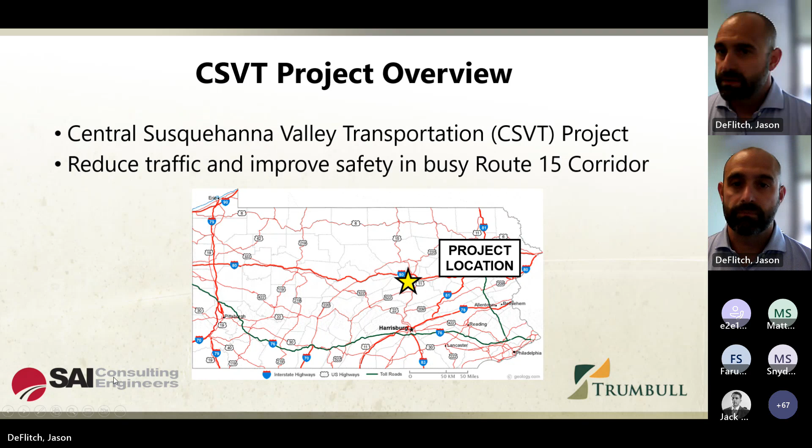There you can see the different sections that are involved in the project. So the northern section that's built, the central portion of the page along the west branch of the Susquehanna River, that's where our bridge is right here. Northern section being open, and then as Jack mentioned before with Matt, he's up there now building the southern section, which will connect everything down through Selinsgrove. This will get folks around that busy area of SR-15, get across the river, and then make connections to points north to I-80.

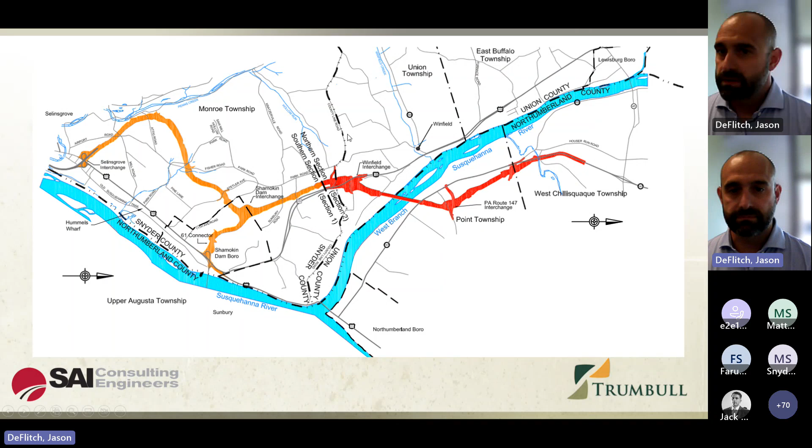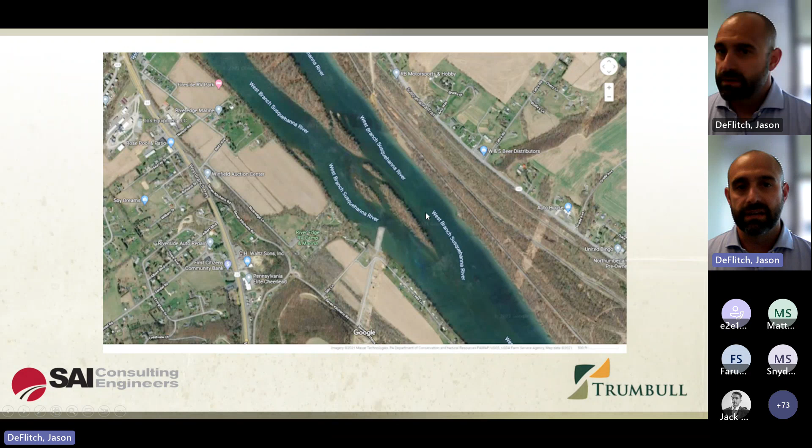Just a quick look at the topography of the area that we're talking about here. You can see the spur coming out in the middle of the screen there, right in the west branch of the river. That's where our structure is going to be. Kind of goes over some low-lying areas, a little bit of adjacent residential areas, over these islands that you see in the central portion of the screen. And then eventually does get into the railroads on the far side, and then connecting up through to points north.

So if you want, there is a website, csvt.com. You can check out. They still have updates up there for the ongoing project, southern section right now. The purpose, as I mentioned before, was to kind of get the trucks and the through traffic away from the local traffic to improve safety and then traffic flow as well.

So to do that, we're going to build a new 4-lane structure there, limited access highway through this area. It ends up being roughly 13 miles long, and it's separated into 2 sections that we saw on the couple slides before this. So we'll go through some of the challenges here with the bid phase, design phase, and then get into construction. I'll talk about the superstructure. I'll talk about the substructure and Matt the construction end.

Real quick on the bid phase before we move in, this was an alternate design. It was listed, plans were posted before advertisement as a planned project, and reviewed by a contractor with SAI and Trumbull together. Planned for this advertisement to come up with essentially an alternate superstructure and some substructure adjustments. That was then advertised and let in September of 2015.

TS&L was finished by the end of 2015 in December, and then the substructure design was submitted in March of 2016, and superstructure thereafter in April. So it was a very tight schedule, being an alternate design, to try to keep everything on track with the original design schedule that was planned.

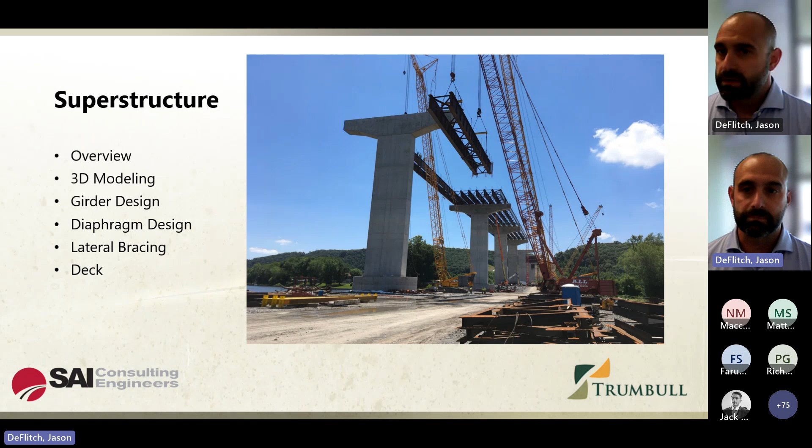So here's a general overview of the whole structure. As you can see, the total length of 4,545 feet, so nearly a mile-long structure. Was split into 15 spans, 3 units, 5 spans each, with each unit being 1,515 feet. This is all per the original design. None of the pier locations were changed to maintain all the permitting work and the H&H work that had been done on the project. So the focus here was to change a little bit on the superstructure and hold those pier locations, and then assess the piers.

So you can see the spans range from 238 feet to 350 feet. Most of the units, Unit 1 and Unit 2, have identical span arrangement, with Unit 3 having some adjustment spans to get up toward abutment 2. There is where we have the 238-foot span. It was in PennDOT District 3 and roughly a $156 million contract.

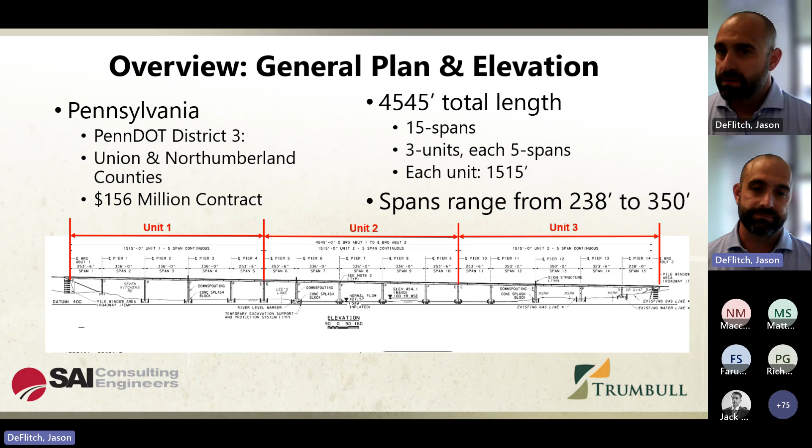So what you see on the screen is a typical section of the bridge, and this is the future section. So you're seeing 3 lanes here versus the 4 lanes that I mentioned before. That is accommodated by the just over 5-foot overhang that you see on the screen. In the current condition, it would be built to just over 2 feet and then widened 3 feet to either side. That would accommodate this future typical section and allow for traffic to flow during a redecking operation.

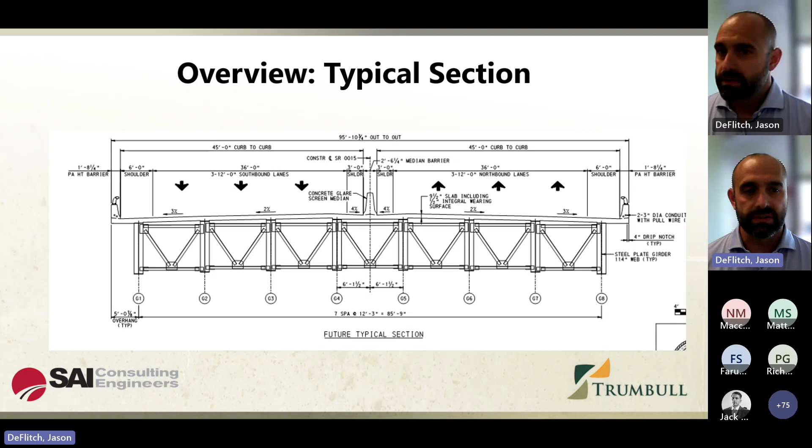So you see the 8 girder section that we have here, the diaphragms connecting them together, and the configuration and the future condition with the 3 lanes and the 6-foot outside shoulders. So take a look at the redecking that would need to occur. This had to be accounted for in all design elements. So in the girder design, diaphragms as well, all the way down through the substructure. Maintaining those 4 lanes of traffic in each particular phase.

So you see the first phase at the top there showing 4 lanes of traffic being maintained on the left side while we rebuild and widen to the right. Again, switch traffic over to that side that we just built, then do the left. And then of course, with longer span structures like this in particular, and the traffic that needed to be maintained, there's a closure pour between girders 4 and 5 anticipated in this redecking condition. And each of these phases and the differential deflections, et cetera, would have to be accounted for in the design of the structure.

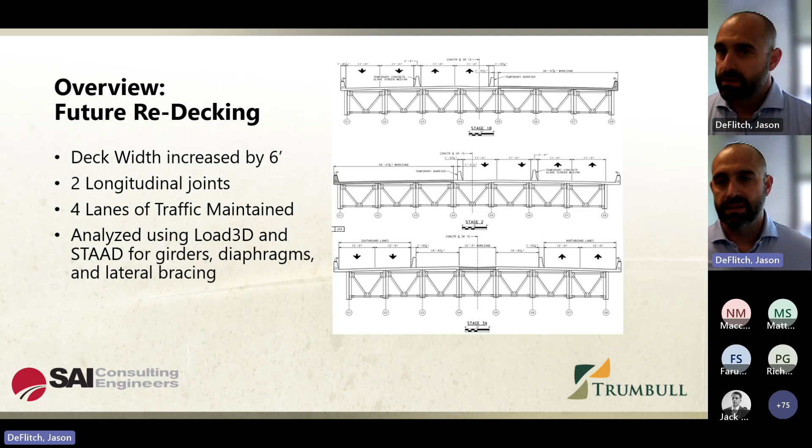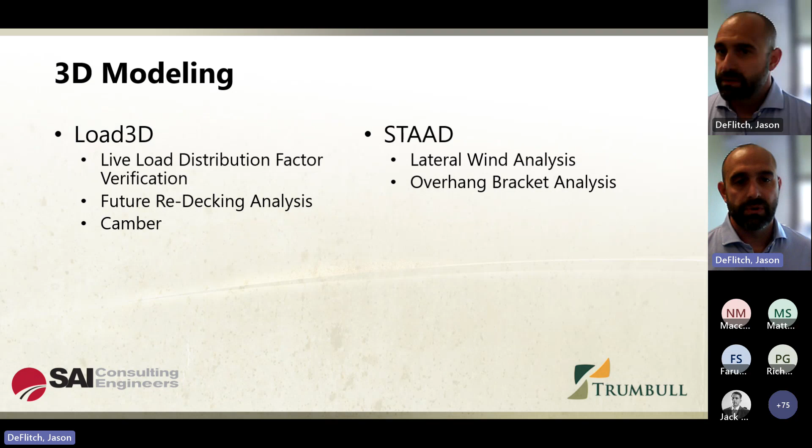3D modeling: we used two programs to do our 3D modeling. LOAD 3D was a SAI program that is approved by PennDOT. We used this for live load distribution factor verification, along with the redecking analysis for the girders and the camber. And STAAD was utilized a lot for the lateral wind analysis, overhang bracket analysis, diaphragms, etc.

So getting into the LOAD 3D live load modeling that we completed on the project, we did look at 3D distribution factors, what would be an equivalent distribution factor for these girders based on a 3D analysis. We're able to compare those load effects with line girder distribution factors and determine between the two, whether it was a line girder or the 3D, which one had governed, and use the worst case results for the design. For the most part, line girder distribution factors did govern, except for shears at the ends.

We're able to then get this into the STLRFD program and still use PennDOT's standard STLRFD program for the girder analysis. Future redecking was very similar. You could do a 3D analysis, check out what we thought distribution factors were governing in that condition, and then account for that condition in our girder design. We did model all the diaphragms and the lateral bracing in LOAD 3D, and we're able to extract some of those results for the design of those members as well.

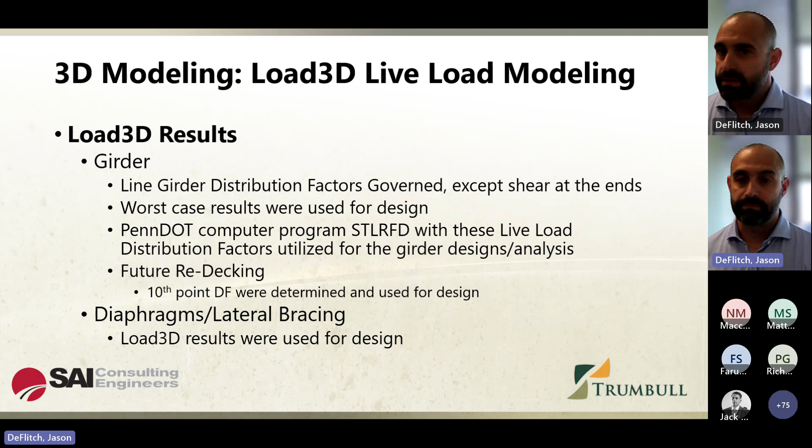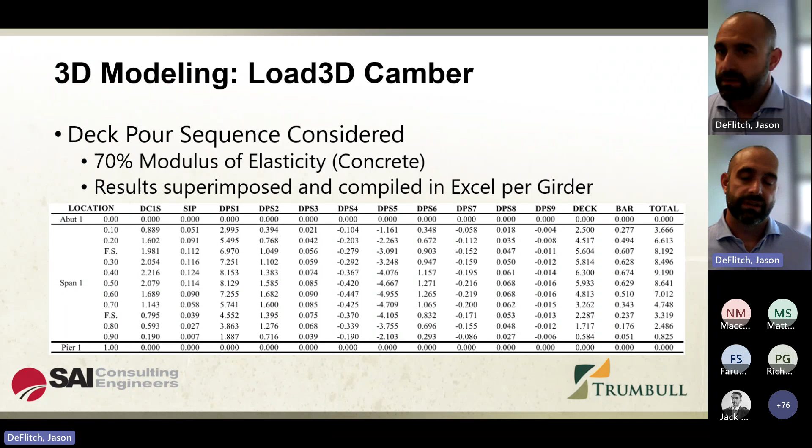Once the concrete was poured in a particular span or location, we used 70% of the modulus of elasticity per design manual for that concrete, and then compared each of the girder results in the end, and we're able to determine that the camber for each of the girders was roughly equivalent to each other and come up with one camber table that would be considered on the project.

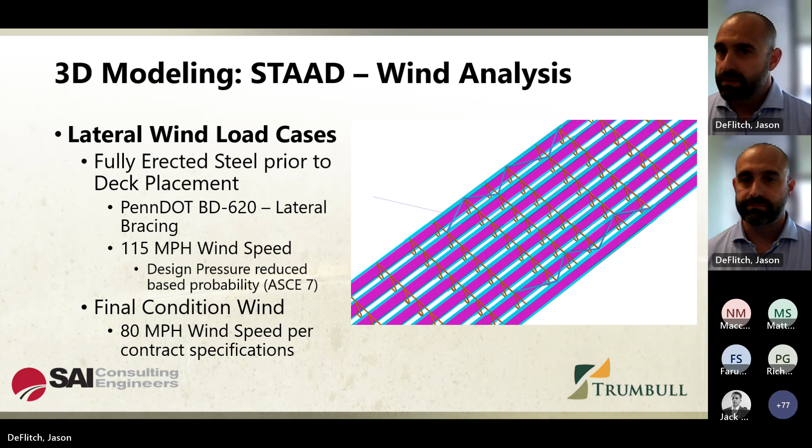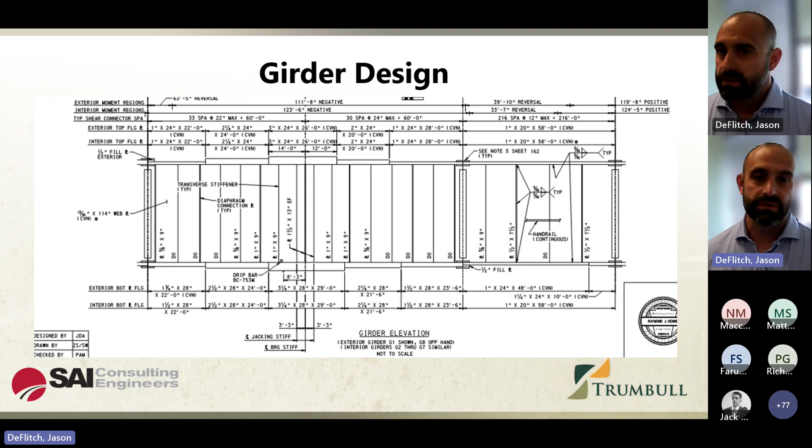So looking at the overall girder design, the web size is 114-inch by 13/16. That was set by a span to depth ratio. That's the depth. Once we have the depth, we wanted to ensure that we would not need a longitudinal stiffener. So we're able to take a look at our ratios there and determine what thickness of that particular web size would be required in order to prevent that longitudinal stiffener. That's how we came up with that web size and held that web size.

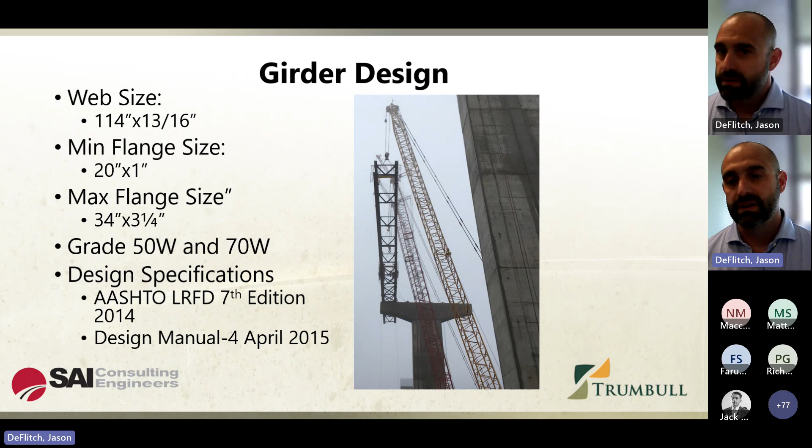So you can see the variation in the flanges as well, from 20 by 1 to 34 by 3 1/4. So a large variation there, but also as we're going through the design here, we want to create some repeatability of those flange sizes so that we can procure certain amounts of flange size material, cut that, and utilize that throughout the length of the girder in our transitions. It was a hybrid girder, so weathering steel 50W, 70W there, along with the design specifications you see below that we designed.

STLRFD, as I mentioned before, was utilized. So after we're able to make that comparison between the 3D distribution factors and the line girder distribution factors, come up with the controlling distribution factors and put them into the user-defined distribution factor command within STLRFD to account for them appropriately.

Lateral stress, we could extract that from each of the 3D models that we saw before, account for the fact that we have diaphragms in there along with the top flange lateral bracing, see how that affects the stress on the girders, utilize the LAS command rather than what would be a more conservative assessment when designing our girder in STLRFD. We did check each of those conditions. So you have the fully erected steel, then you have the deck placement during the actual deck placement operations, and then the final condition where the deck is hardened and we now have our composite section.

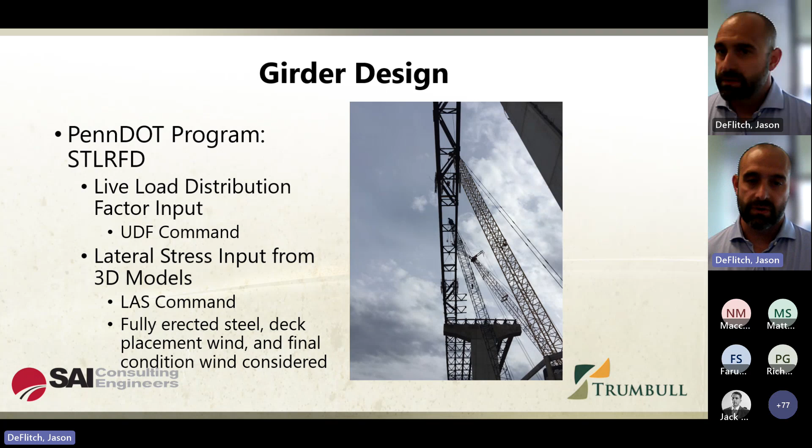So to get that economy of scale, that repeatability that I mentioned before, you have 8 girders over 15 spans. So yes, if you make small changes, those results can result in significant savings over the length of the structure itself. But you do want to create some repeatability in there for the fabricator in their procurement of steel and in the fabrication process. In addition here, the code's going to say that the exterior girder has to be at least as strong as the interior girder, but it does allow for you to have the exterior girder be stronger than the interior girder. In this case, the exterior girder design governed, and we did make the exterior girder stronger than the interior.

The web, as we mentioned before, was set based on the span to depth ratio. Try to ensure that we weren't going to need longitudinal stiffeners, and the transverse stiffeners that you saw in the girder sheet that we showed before, that was just around the piers. Try to limit the amount of that expensive steel detailing to just where it's needed around the piers.

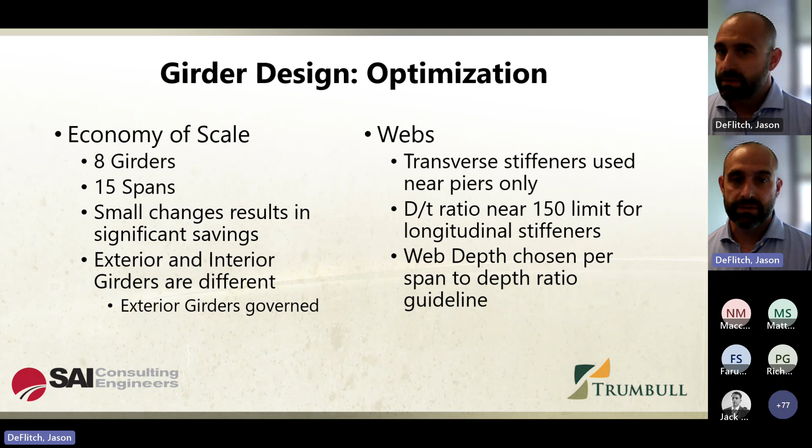So for the flanges, we did have a combination of grade 50 and grade 70 to utilize. Tried to have our typical rule of thumb to save 1,000 pounds of steel in order to make a transition. That tighter diaphragm spacing, of course, you want to limit the amount of diaphragms you're going to have, the expensive detailing for those diaphragms throughout the length of this structure. But you also want to gain effectiveness for those flanges. So the tighter diaphragm spacing was held just around the piers to try to help the flanges with lateral torsional buckling. And the 3D models that we had included the bracing loads to reduce the loads on the girder, try to maximize what we could get out of those flanges rather than a more conservative approach in allowing STLRFD to calculate the wind.

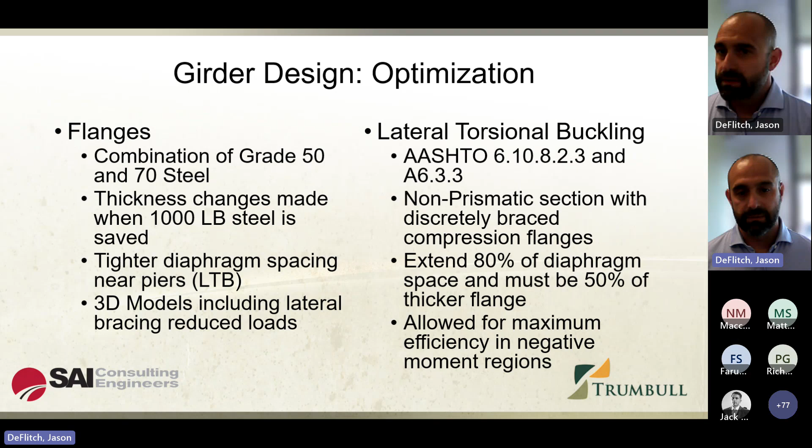So to take a look at that lateral torsional buckling, you see the sections of AASHTO that we have there for non-prismatic sections discretely braced around the pier. There's a couple of items in that section of AASHTO which, if you utilize those, can help with your design. So if you extend the thicker section at least 80% of a diaphragm space, and then you transition down your thinner flanges at least 50% of your thicker flange, you can gain the maximum capacity of that flange. And something that STLRFD really isn't going to point out to you is if you're at 79%, that you're inefficiently using the sections that you have. So it's good to be aware of little points of the code like that that can assist you in getting the maximum amount of value of the steel that you're providing in your design.

A long structure like this is going to have a lot of field splices to put the girder together. So we had 384 field splices total. Want to gain efficiency out of our splices as well. We're able to use a Class B slip surface. And then in order to help out the contractor, as you imagine, it's not just the thickness of the steel plates that's going to occur here or even the number of bolts, but each one of those bolts takes labor time to put the girder together. The contractor in this case was looking to use cranes to make these connections in the air. So every bolt that can be saved is going to gain efficiency in the end with the contractor.

It's one advantage to being on a team with the contractor that you can discuss that with them and then adjust your design to try to help out what will actually occur in the field. So we use the 1-inch bolts, minimize the number of bolts used in each of these field splices, and then try to group the splices together as much as we can. Again, trying to gain efficiency in the splice design, but gain some repeatability for fabrication and for the contractor as well.

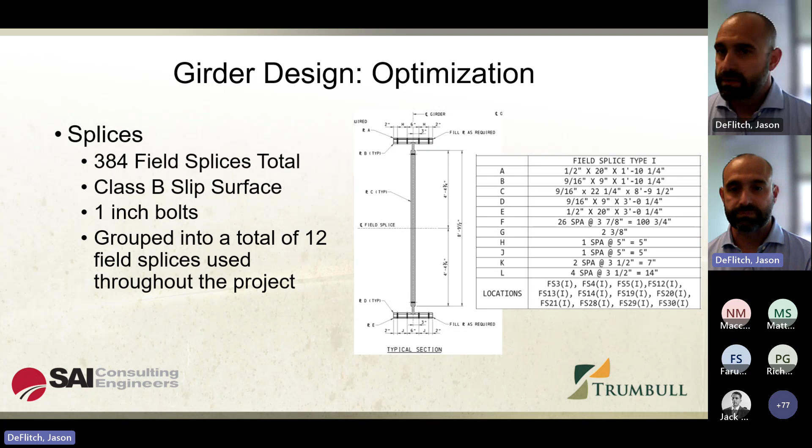So detailing wise, all the stiffeners and splices occur at the same location for all girders. So again, creating that repeatability for the contractor and the fabricator. You saw the flange width in the previous slide that we went from 20-inch flange width to 34-inch flange width. So those transitions did occur at the field splices, which gained some efficiency in those transitions.

The camber table was the same for all girders. We were able to make that comparison based on the 3D camber table that we were able to extract. And then that communication with the fabricator and the contractor really helped throughout the design to implement things such as the 1-inch bolts that we were able to utilize in the splices.

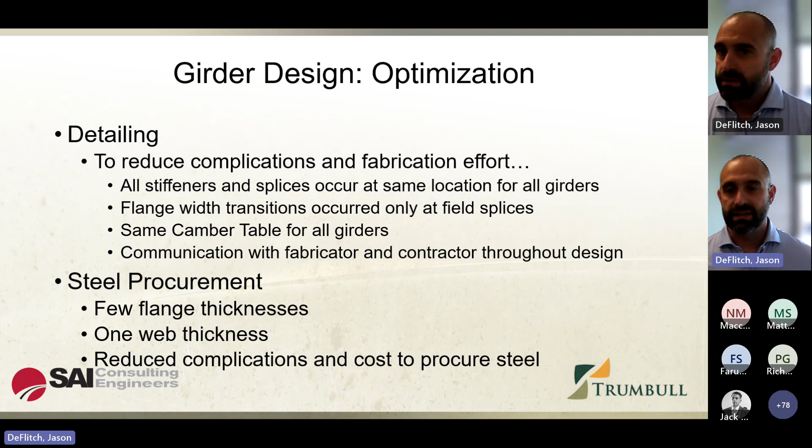So looking at the diaphragm design, again, number of diaphragms utilized throughout the length of the girder, not all that dissimilar from the splices. Want to create some groups of these diaphragms for repeatability through the structure, but at the same time want to gain some efficiency in our design. We ended up with 9 diaphragm types throughout the structure, but even with those 9 diaphragm types, we were able to limit the angle sizes used on the project to 5 different angle sizes and allow those to be reused in different configurations and in different diaphragms based on that design.

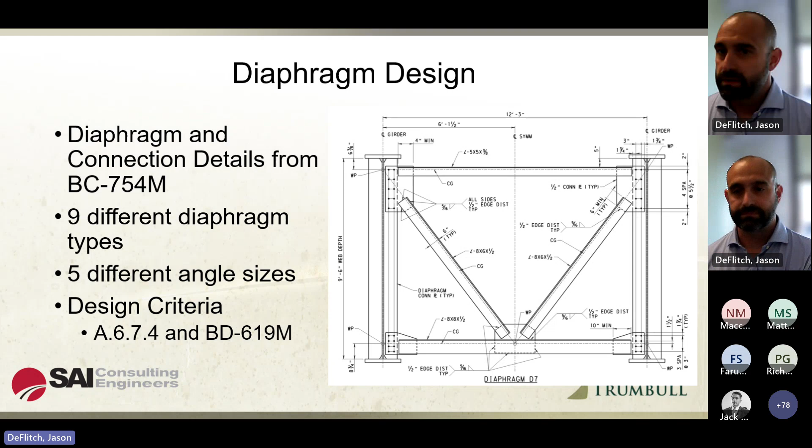So utilizing the 0.65 area reduction for single angle connection eccentricities, the DM4, that'll help limit the amount of load that's drawn into the diaphragm for the diaphragm design, and then account for the diaphragm design with each of the conditions that it would be under. So you have the final condition and the redecking condition that's going to be governed by Strength I, Strength II. But then you have your lateral forces, particularly the wind on a tall structure like this. We're going to check Strength III.

That's going to be the erected steel, deck pour condition, redecking, and final conditions as well, just to verify for those lateral forces. And then fatigue as well. You have the end welds of these single angle connections based on the BC-754. And that did control some of our locations here for how we detailed the size of these angles.

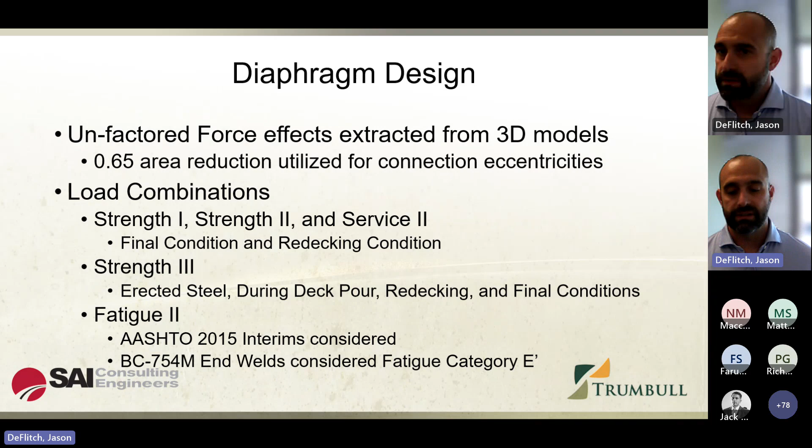In addition to the applied load effects that we got from the 3D analysis and accounted for in the diaphragm design, the diaphragm also, as we mentioned before, for lateral torsional buckling, is going to provide bracing to the girders. So you can use the criteria that you see on the screen, calculate the force that you'd expect in the diaphragms to provide that bracing support to each of those girders. It becomes an additive effect on the applied loads to the structure that then be combined in each of the combinations that we saw before.

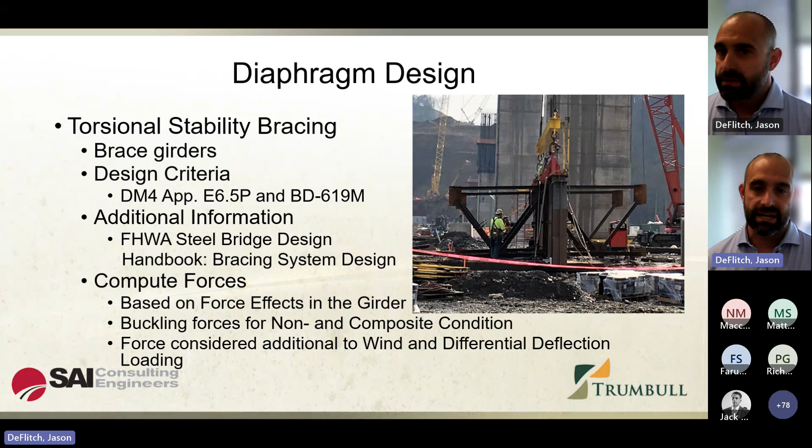It's gonna help when you have the deck cured in the final composite condition. You'd be concerned with the bottom flange bracing that would occur in that state. And before that, when you don't have the deck in place and you're checking those conditions that you have a non-composite girder, you're going to account for the bracing force of both the top flange and the bottom flange, just minimizing when you're considering this bracing force to maximize the efficiency of your design.

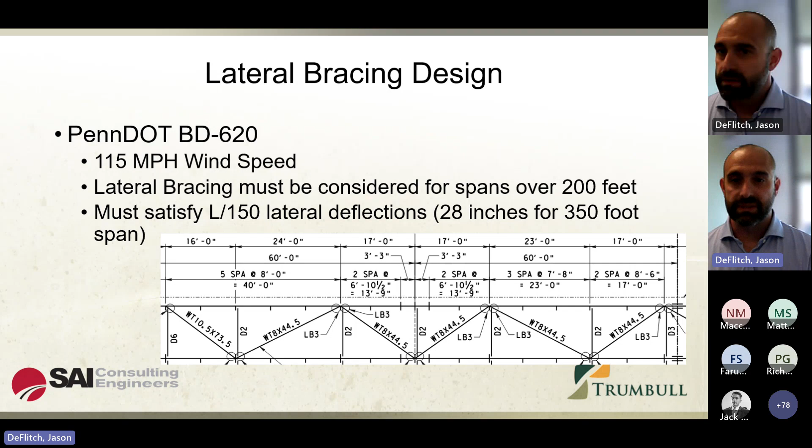Lateral bracing was provided per PennDOT BD-620. That's accounted for that 115 mile-an-hour wind speed that we mentioned before, and the L over 150 limitation for deflection. So you can see for the 350-foot span that we had on the structure, the 28 inches that it was limited to before. So we centered this around the pier and incrementally worked out until we were able to limit the deflections and supply lateral bracing where it was needed.

The top flange lateral bracing was utilized with a bolted connection to the top flange. We tried to limit the amount of sections that were utilized, so I used a WT8 and a WT10.5 as the 2 different sizes for WTs that were utilized as the lateral bracing, try to increase that repeatability and some efficiency of the use of these shapes throughout the project. We included dead, live, and wind loading in these designs as well.

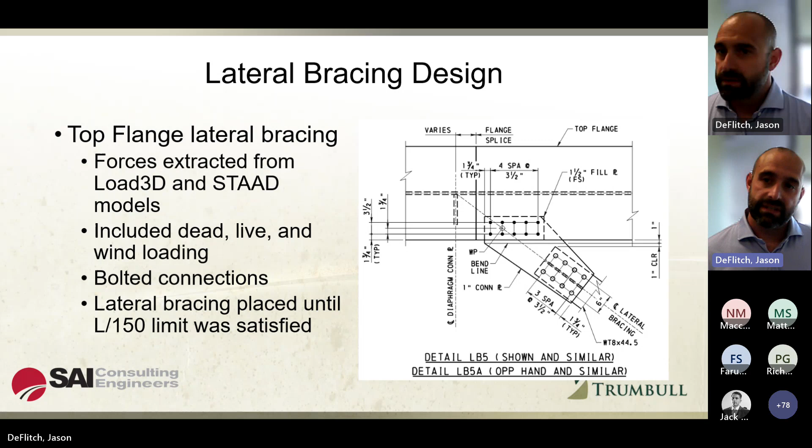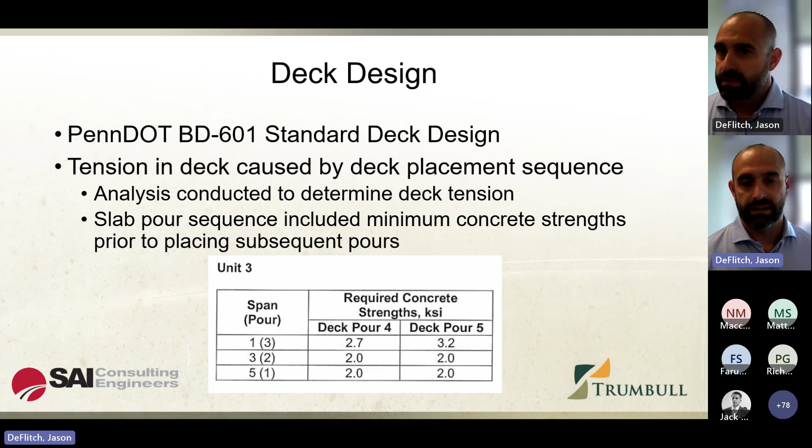With that, I'll turn it over to Ahmad here, and he can discuss the substructures.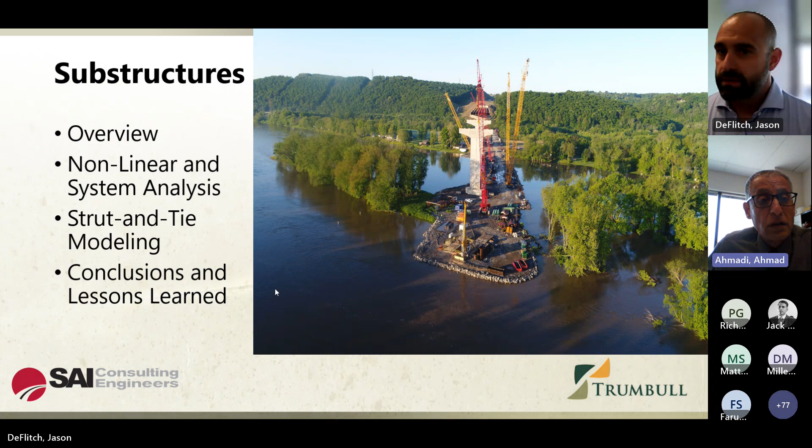Overall, there are two stub abutments on piles, steel piles, and there are 14 piers. Of those 14 piers, 6 of them are in the water. 5 of those 6 in the water are on caissons, 8 caissons, 5-foot diameter caissons, and the rest of them are on spread footings.

There are 4 expansion dams on this bridge. 2 of them are finger dams, and 2 of them are modular dams. The modular dams are located at Pier 5 and Pier 10. Those 2 dams' displacement is approximately 22 inches.

On an overview of the pier cap. The pier cap is approximately 90 plus feet long and 18 feet deep. At the stem it is about 18 feet. At the tip of the cantilever it is about 9 feet deep. And the thickness of the cap is 9.5 feet.

The stems of these piers vary from 56 feet to 159. This is from the bottom of the cap to the top of the footing. And the width of it is 28, and the thickness of the stem is 9 feet. Some of these piers, the 6 in the water, have a mass concrete underneath them, a plinth.

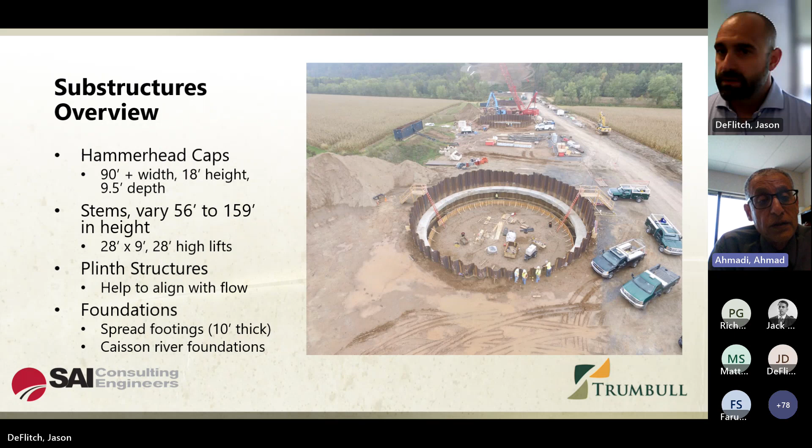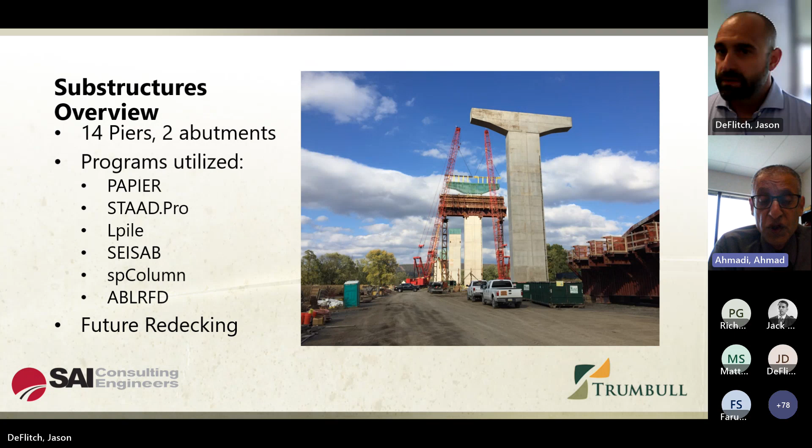For the analysis of these substructures, the programs we used are PA-PIER, STAAD.Pro, LPILE, SeisAB, spColumn, and ABLRFD. And these substructures are designed and analyzed for the future redecking or the final structure.

We used SeisAB because, as per AASHTO and Design Manual 4, you have to design a substructure for approximately 30% of the total dead load for the seismic analysis. We used SeisAB, and that resulted in approximately 10% of the total load. There was a big load reduction for the seismic in that case, and seismic did not control.

For the structure analysis, when we do the pier analysis, when you have multi-fixed piers, which in this case we had, there are 3 units. Each unit had 4 fixed piers, except unit 3, which had 3 fixed piers. When you have multi-piers, you have to do a more accurate analysis, whereas when you have 1 fixed pier, you can just take the tributary wind load and apply it, and that's all it is. When you have multi-fixed piers, the stiffness of the system makes a difference. Therefore, you have to do a system analysis.

The system analysis is when you model all your piers and your superstructure as a stick model, not complex, a stick model all together, and the displacement and stiffness of each one affect. For example, in these structures, in unit 1, we have 4 piers. Out of these 4, pier number 1 attracted, in the final design, 50% of the total horizontal loads. While if you do a simple analysis, you give it tributary 25% of the horizontal loads. But the system analysis showed that 50% of the load went to just 1 pier, and the other 50% to

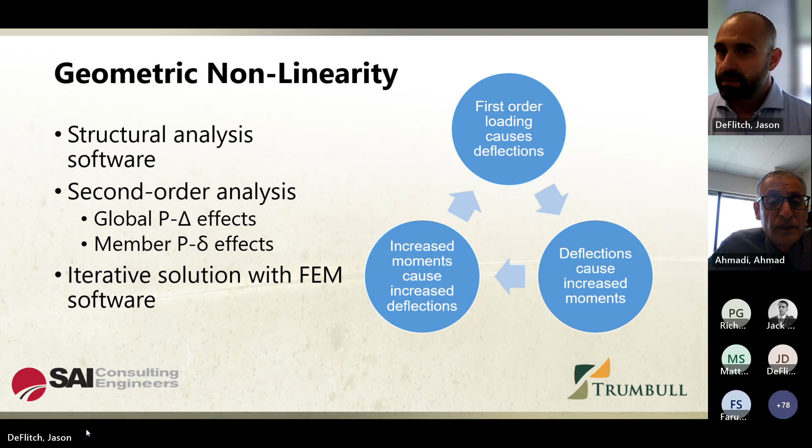Next one, please. Jason, next screen, please.

Overall, Strength 3 and Strength 5, which is wind, control the design. For service, a modified service load case was considered for this bridge, because for a bridge this tall and in this location there was a possibility of high wind occurring with the temperature at the same time. Therefore, a modified service load was created, which is wind at 115 miles per hour, corresponding to 80 miles per hour base wind versus 50 miles per hour in LRFD or the design manual. And that also controlled some aspects of design. As I mentioned, we did all these load cases and load combinations for different stiffnesses based on the moment curvature section properties. Next screen, please.

For pier design, we used the PCA program. However, from our STAAD model we computed the moment, because that moment is a function of the P-delta, and we were not supposed to use the moment amplification factor in the program. And also because the moment was different based on the stiffness, we took the moment from the STAAD model and manipulated some parameters in the input to make sure the design of the pier would be based on the shear and the moment of the STAAD model.

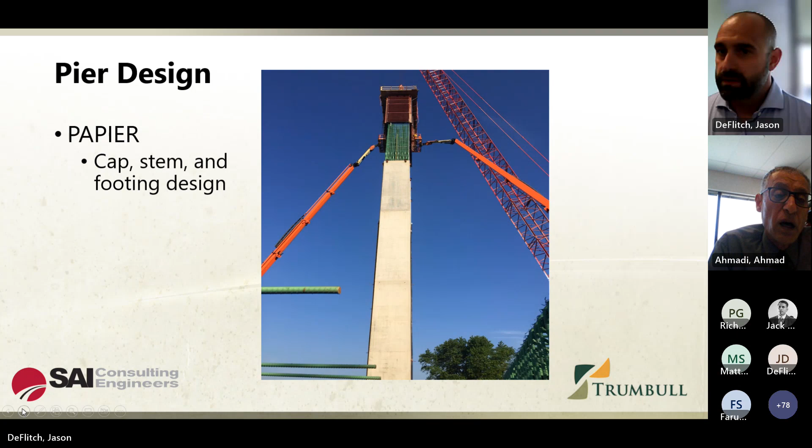These are some reinforcement for the stem. As I said, we divided the stem in 28-foot segments, except one odd segment at the bottom. This made it very easy for us for the drafting, a lot of saving in the drafting, and also a lot of saving for the contractor, that he knew that all his sections, except that one section at the base, are going to be 28-foot long, and then his forms and everything reused over the entire 159 feet based on that 28-foot.

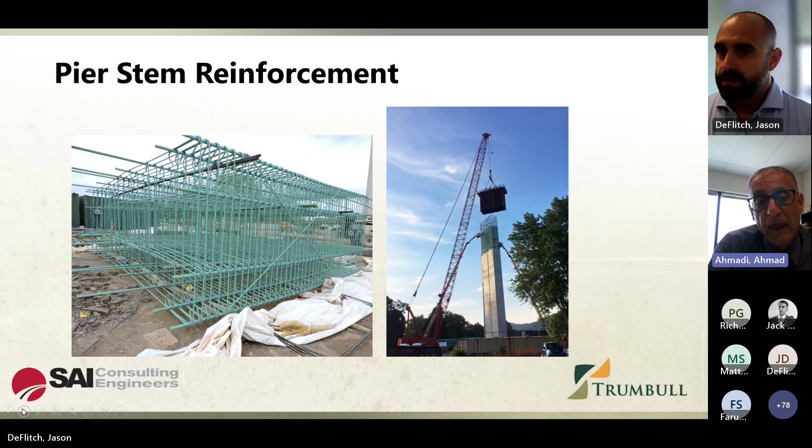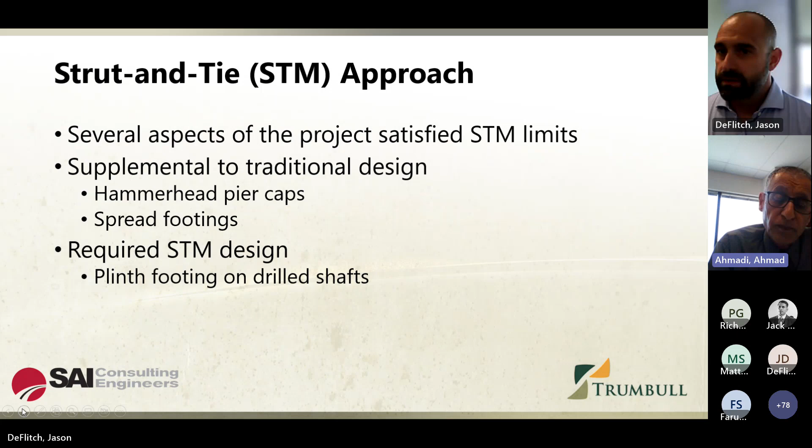Jason, next screen, please. The other thing was a strut and tie method we used here. Per AASHTO, our cap, our footing, and the plinth at the bottom were supposed to be done with a strut and tie method analysis besides the conventional. We did several strut and tie method analyses for the cap, the footing, and the plinth, and based on those results, we revised our reinforcement, and it was the worst of the two, traditional analysis and strut and tie method, especially with the cap shear reinforcement controlled by strut and tie method.

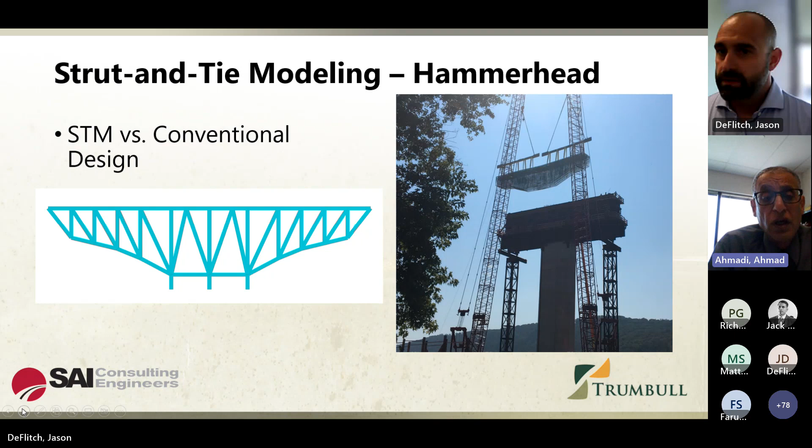Here you see a model of a strut and tie for the cap. This is for the full width of the bridge. And also we did another one, which is next screen, for the half-width construction. We also analyzed our pier cap for strut and tie method. This is the strut and tie method model for the half-width construction. As I said, the shear reinforcement is controlled by strut and tie in this model.

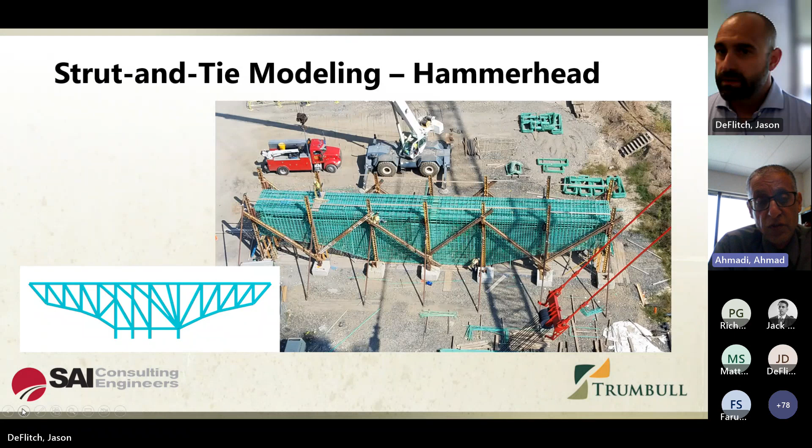Next screen, please. This is the plinth I was talking about. As you see, the plinth is in line with the stream, and then the stem is skewed to the plinth. This plinth is approximately 60-foot long and 30-foot wide, and something 15 to 25-foot high. And we did a strut and tie method for

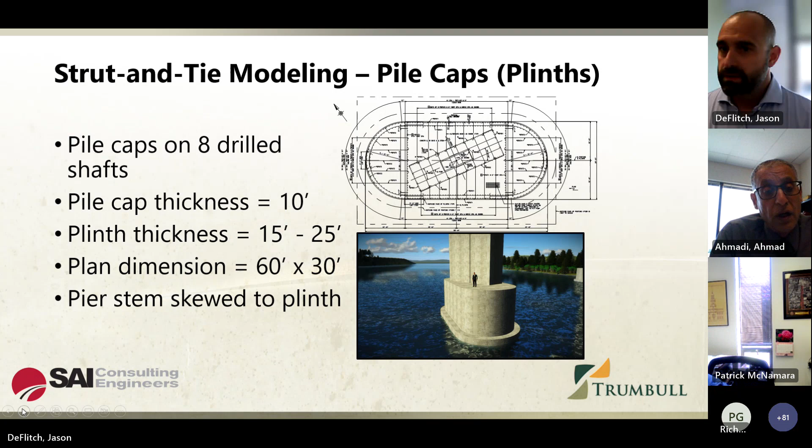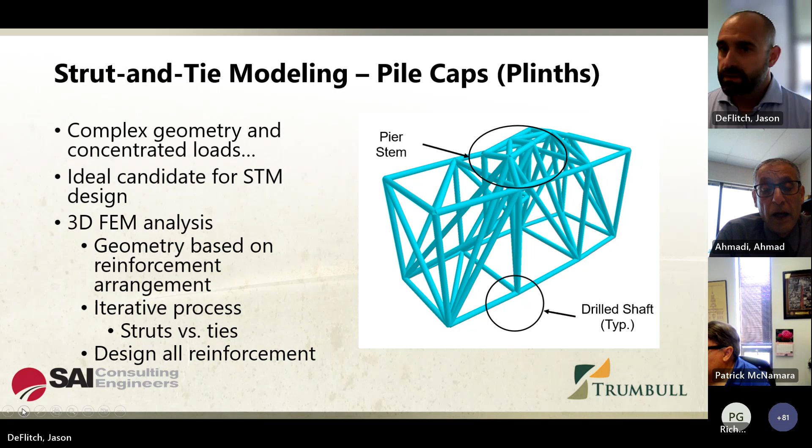the plinth also. Next screen, this is the strut and tie model for the plinth, which is a very sophisticated and complex trial and error method to find the correct model for your strut and tie method here. Some of the reinforcement, their length, controlled by development length, is controlled by the strut and tie method, which will be adjusted accordingly. Next screen, please. This is the actual reinforcement of the plinth. You can see how massive it is.

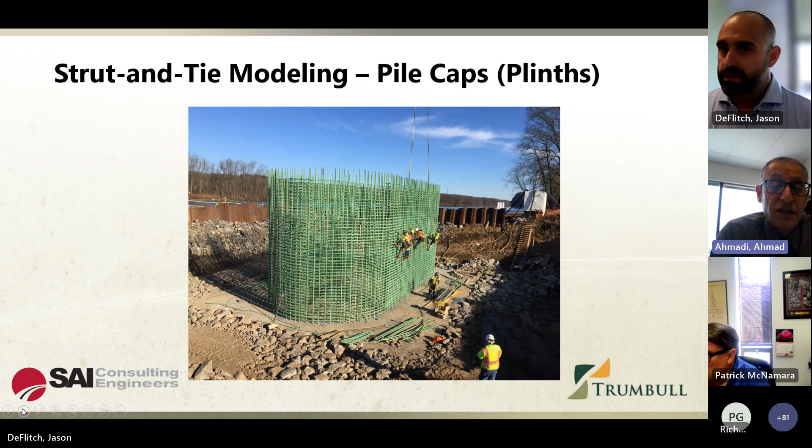Next one, please. Okay, again, this describes that the abutments were on steel piles, and the piers, the 9 piers, were on spread footings, and the 5 piers on 5-foot diameter caissons. And we used LPILE and spColumn for design of the caissons.

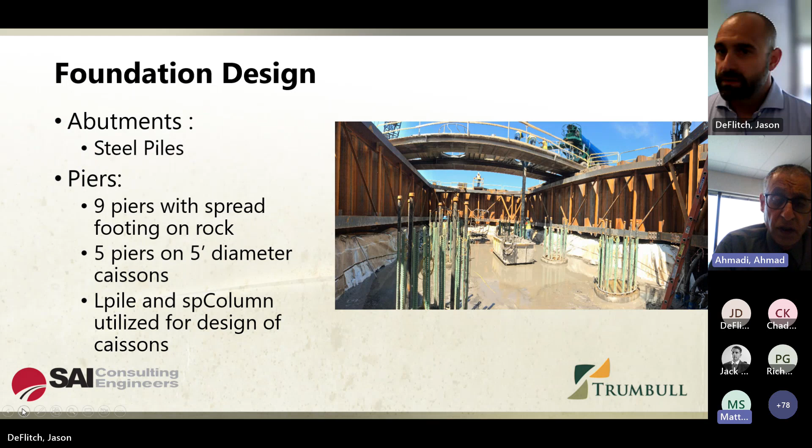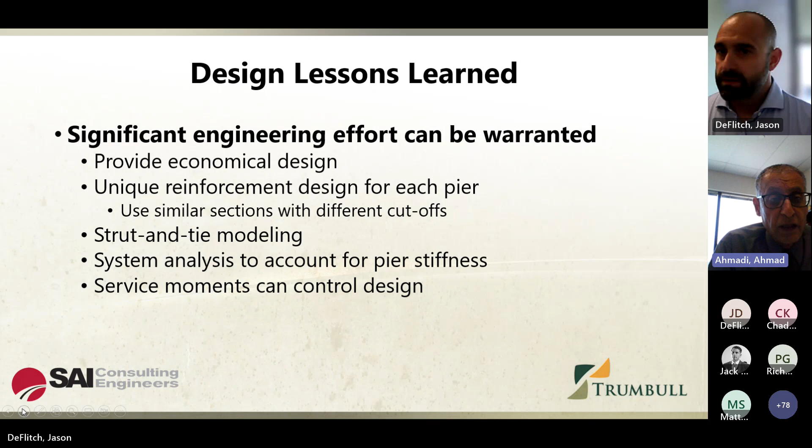Next one, please. The design lesson we learned here is that the time we spent on those substructure analyses paid off, because we made a significant saving in the rebars. The strut and tie method on all of those provided a much more accurate design. And also the moment curvature provided a very accurate design, and it resulted in correct distribution of the load between the substructures. And also, as I mentioned before, the modified service moment controlled part of our design. This is the overall overview of our substructure design. Now Matt is going to talk about the construction topics.

Hey, good afternoon, everybody. Can you hear me? Yes, we can. Yeah, we can hear you, Matt. Okay, just making sure, an audio check there.

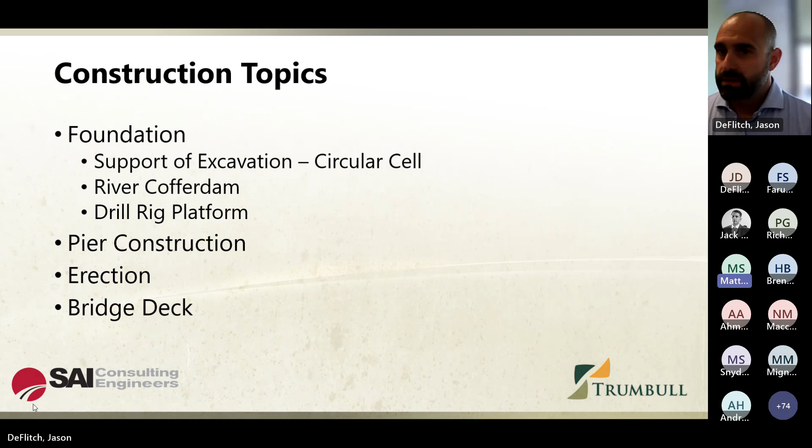So for the construction side of things, one of our first challenges was gaining access to the foundations for the bridge. If you can go to the next screen, I can show a picture here. We had several types of shoring that were required. This picture to the right was taken from abutment 1 looking out across the bridge. Of the 14 piers, only Pier 1 could be open cut, which is in the foreground of this photo. All of the land piers adjacent to the railroad tracks, on the other side of the river from this photo, were all more or less a custom cofferdam to address each track individually.

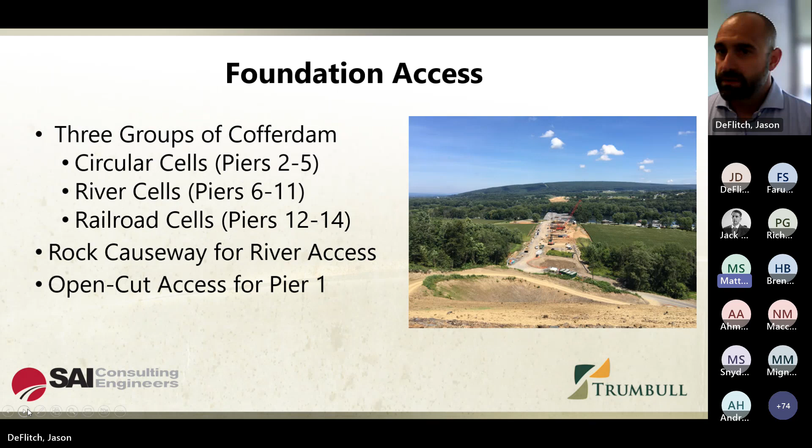Then all the remaining cofferdams required for the land piers were a circular cell with a concrete wale. We somewhat standardized that process to help with fabrication, material procurement, and construction in the field. And then there were piers in the river. For all of those we standardized the cofferdam frame and used sheet pile in and around our causeway for access to those foundations. Next slide, please.

Here is a snapshot of our circular cell design. As you can see in the photo there, the foundation, the footing of it is in the wide open. As large as these footings were and as deep as they were, ranging from 25 to 30 foot in depth approximately, with a rectangular shaped cofferdam, most designs we looked into would have required some type of center strut, which would have conflicted with both the foundation formwork and the stem formwork.

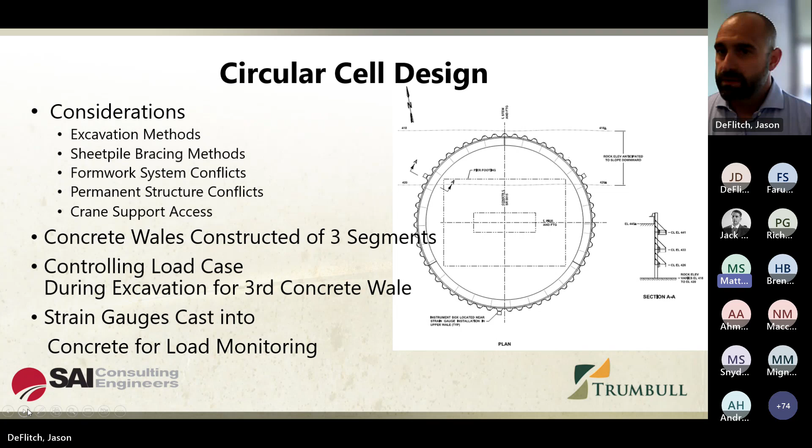So a new approach was looked into where we actually did a circular cell. So yes, we fit a square peg in a round hole there. We just made the diameter of the cofferdam large enough to encompass everything. And we used a concrete wale to support the sheet piles as we excavated our way down. On the next slide here, you'll see a few pictures related to it.

So in the photo on the left there, we would drive our sheet pile in the circle. We had to design and construct a template. It was a chord section of that diameter that we could then set. It was 11 or 13 pair of sheets off of this template. We put onto it some survey markers so that way we could model it in a file and our survey could go out and shoot that template in so we could place it where it belonged.

Place our sheets around, drive them deep enough to be secure. Then once we made closure of that circle, we drove them all to depth. The photo on the right here shows the concrete wale construction in progress. You see the first wale there is suspended in the air.

There were rebar hangers that were welded to the sheet pile because it would prevent any kind of slippage or movement of that concrete wale during the time as you began excavating the cofferdam, before the sheet piles deflected with their load and engaged into that wale. There was concern that that movement could occur. So these hangers were used to eliminate that. Next slide, please.

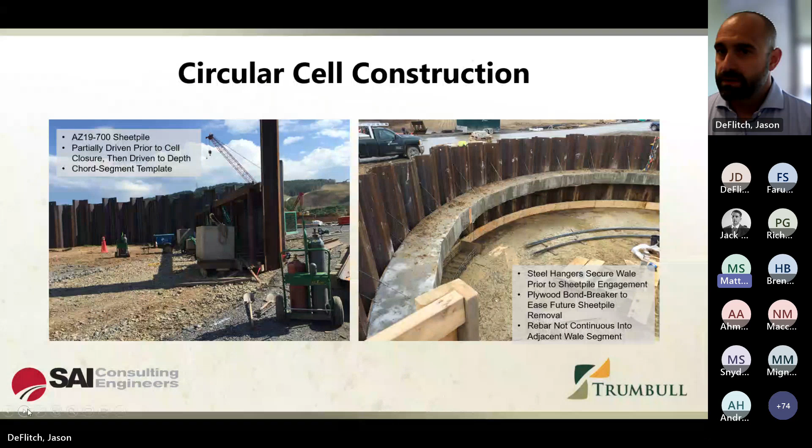See here in the photo on the left, the controlling condition for these cofferdams was actually not the final condition where we began construction of the concrete footing. It was after the second concrete ring was constructed and while excavating for the third. Because in that condition, your cantilever of the bottom of your sheet spanning down below that second ring was at its greatest. Once the third ring was in place, the remaining excavation was removed to achieve grade for the bottom of the footing.

You can see here in the photo on the right that this approach to a cofferdam allowed us free rein access. We didn't have any center struts to phase in and out or to work around, and we were free to fly our formwork in and build our pier stems without any distractions. Next slide, please.

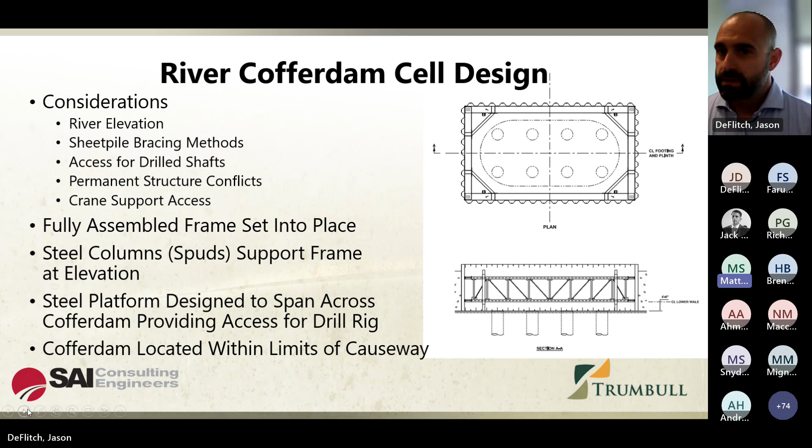So for our river cofferdam, we employed a similar concept where we designed the cofferdam template to be large enough and we utilized a corner style bracing. That way we could eliminate any type of center struts here as well. And we would design this frame and it was used for all of the piers in the river. It had to be large enough to encompass the construction of our footings, but it's actually small enough so we could get a drill rig to reach from the top surface to drill all 8 of those caissons. And on the next slide here, we'll see some more information there.

So in the photo on the left is that frame. We had it fabricated and assembled on site, and we would pick it up and set it in place as one pick. And we had 2 of these that we would leapfrog as we built our piers across the river.

The photo on the right: in order to drill down in and around those caissons, there was not enough room around the caissons themselves to fit a drill rig. So trying to figure out how to perform that work, we decided to get to it from the top side, which is why we had to keep the sides of our cofferdam small enough to reduce the span that this platform would need to reach across.

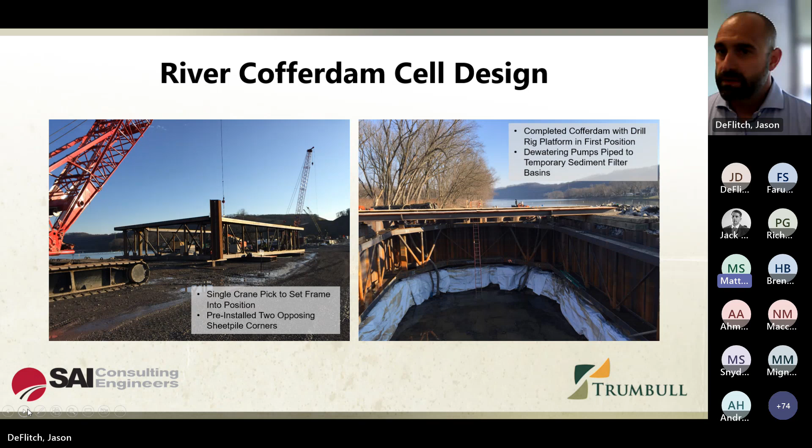On the next slide here should be some design details. So the platform was never designed to actually support the drill rig to tram across it, but more so to creep over top of the sheet pile, as you can see there on the right, to gain access to the drill shaft. So we would put these in 4 positions, so you could drill 2 drilled shafts at a time.

You would drill 1, the rig would then back up, tram around, and enter onto the platform from the other side, and then construct that shaft. And then we would move that platform along to each position to get all those shafts built in place. Next slide, please.

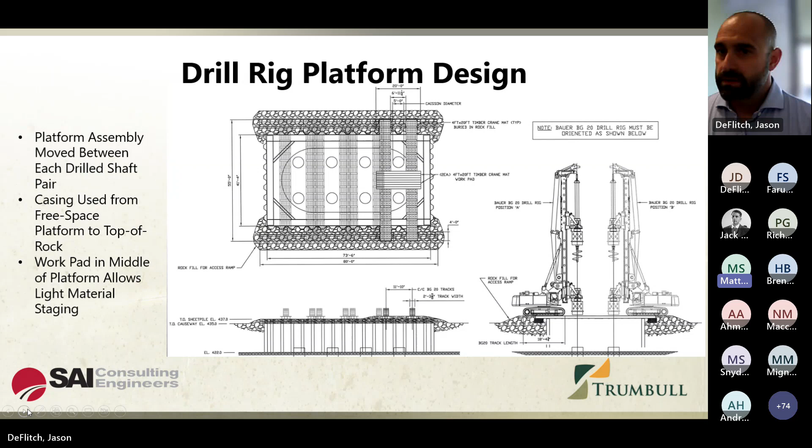We would case into the rock a few feet, so that way when we would drill and clean out the shaft, we would not have any surface water or anything leaking in from the top. The cleanliness spec for these drilled shafts for PennDOT in this district was very strict and severe, and so that was a concern, and this helped a lot with that issue. Next slide.

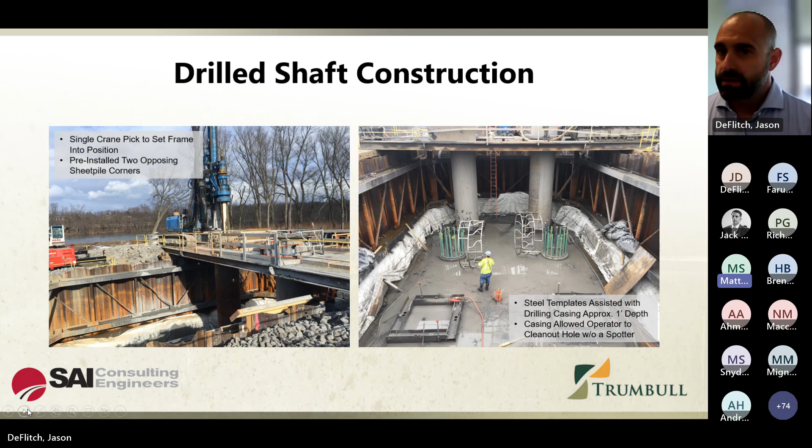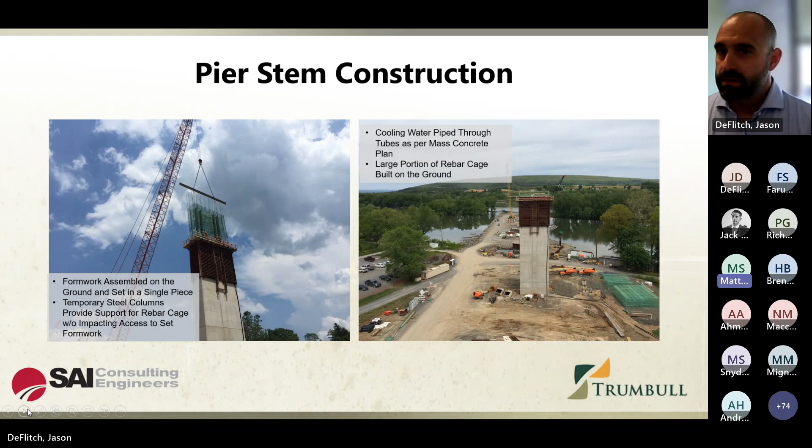That allowed us to pre-tie a lot of the rebar cages, as you can see there in the bottom right photo. We would tie those out ahead of time and stage them where the piers were at, and we would leapfrog our formwork accordingly based on the cure and the strength of the concrete prior to stripping forms. Next slide.

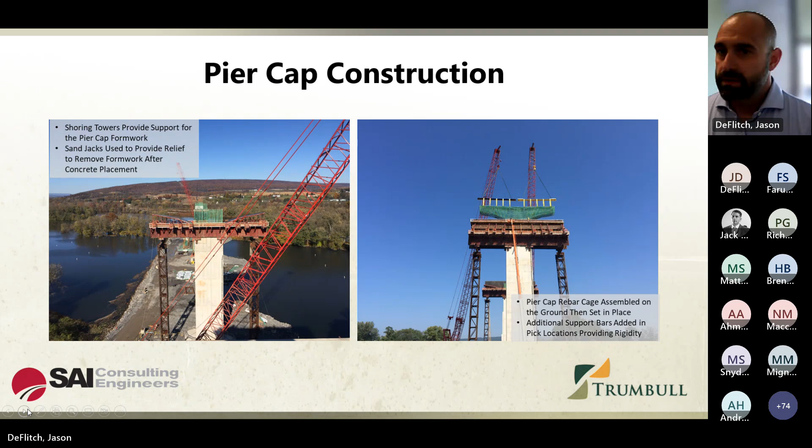For the steel erection, we subbed that out to Century Steel. They did not use shoring towers to erect the girders, with exception to around the railroad tracks, as that was a requirement for Norfolk Southern. So they would use multiple cranes in tandem. And the next slide here will have a picture of that.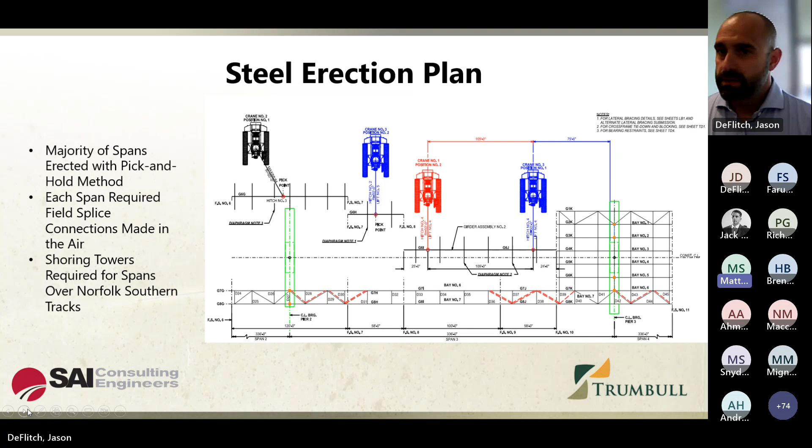If you want to go to the next slide, Jason, here on the photo on the left, they'd use the first two cranes to start setting the process, and then the third crane would come in and help, and they would leapfrog across the way, making field splices in the air. So the pros and cons here is it is a faster way to go. Con is once you start, you're committed to finish that span for that pair of girders.

So we had to pay very careful attention to the wind. So, in the middle of the day, if we thought wind was going to pick up based on the weather predictions, we had several that we consulted throughout the day. We would have a go, no go decision to make sure that we were not partially way through erection and then get affected by wind and have any problems there. And that planning worked out well. We had no issues related to that during the erection of any girders.

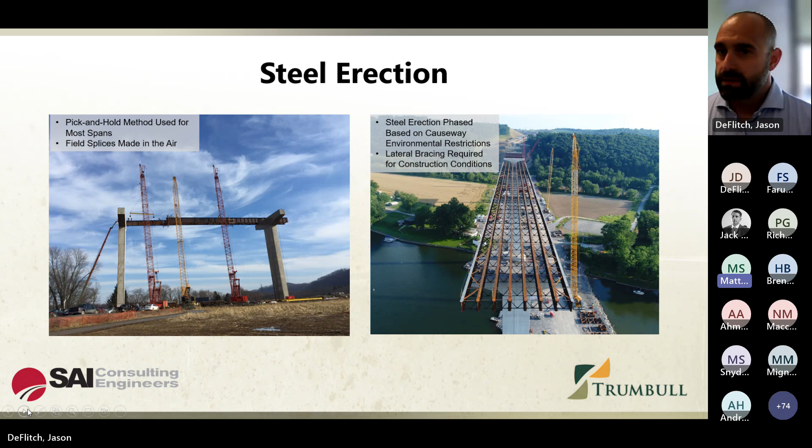The photo on the right shows where the first phase was complete. The river, we can only build the causeway halfway across at a time. So we could build one unit fully on land and a portion of unit 2, which was the unit that spanned the river. And this photo on the right here shows all 8 of those girder lines. I thought that was neat to show. Next slide, please.

Here's just more photos of the steel erection. In addition to going across the river, we also had live traffic we had to set girders over. We were allowed a nighttime detour, just one night at a time, to set the girders. So we had traffic set up during the day where we had barrier to take some shoulder width where we could deliver and dress the girders to prep them for erection the following night. And the photo on the right shows some of the shoring towers that were required for erection in and around the Norfolk Southern Railroad tracks. Next slide, Jason.

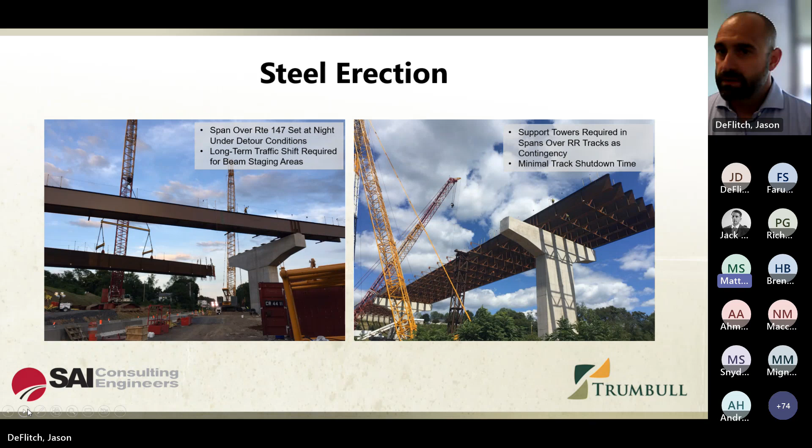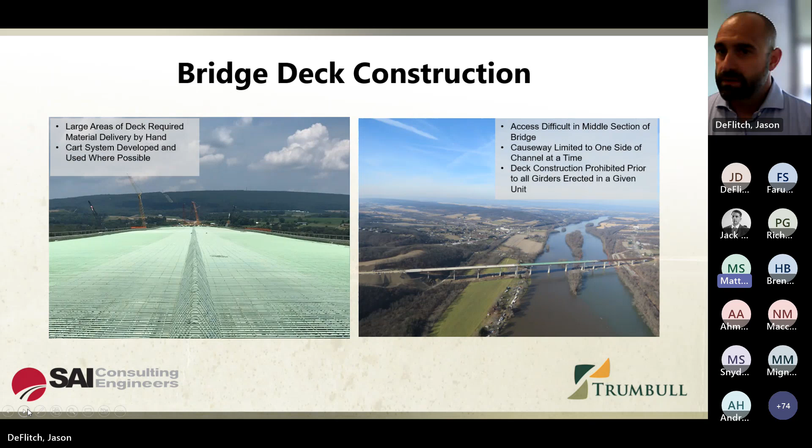We could not, like I said, build the causeway across the entire river. There were flooding concerns there, ENS restrictions. So we would build the substructure and set the steel girders, and then all remaining construction of the deck and parapets would take place without a causeway under you for that portion of the bridge. And some major challenges were, how do we physically get material out onto that deck? And for the most part, laborers had to carry it. You can see here on this photo another picture of the staging where we do have a causeway. We could use a crane to set the rebar up on the deck.

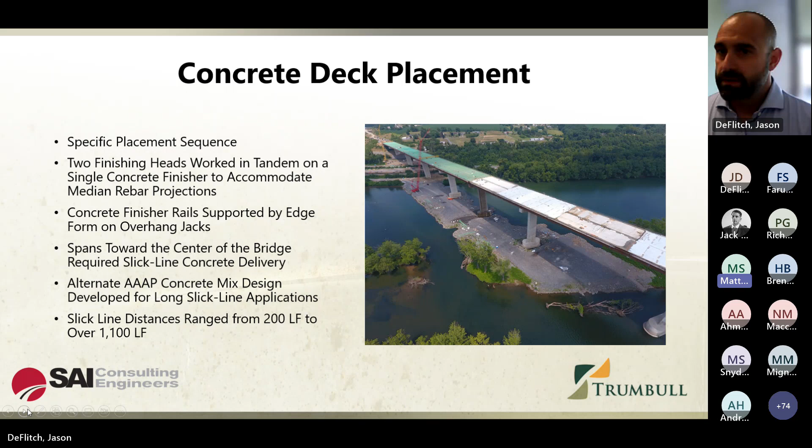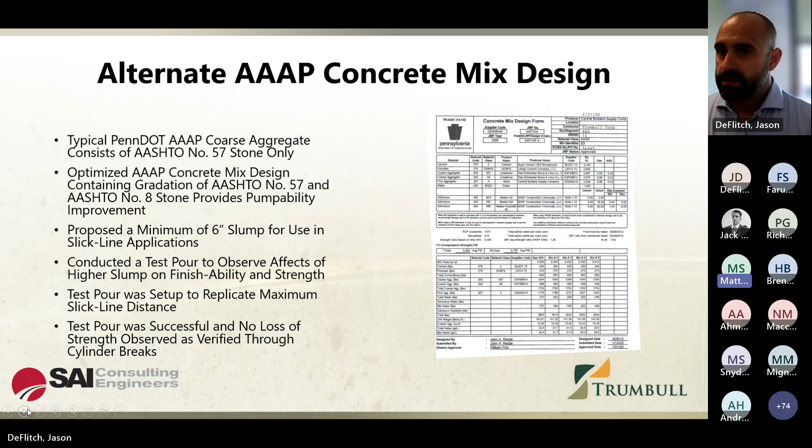Now, another challenge we had here was a slick line. In order to place the concrete out into the river sections, we had to develop an alternate triple AP mix and concurrent with PennDOT to meet their specifications. So we could come up with a mix that would perform through as much as our longest slick line placement, which was through 1,100 feet of slick line, which is a challenge. Next slide. Here is just that mix design, if anybody wants to look at that later. You go to the next slide there, Jason.

One of the last things here before questions is with our overhang jack design, it was pretty straightforward, but one challenge we encountered is up at that elevation, with no trees, no anything around, and it was a high wind location.

We encountered problems with overhang jacks being flipped up by the wind. So we developed a tie down system that had a slack line in it that would only let the overhang jack move maybe a quarter of an inch, and that slackness was required and important, so it didn't add any more downforce to the overhang jack and potentially overload it. Because we did use our overhang jacks to carry the weight of our Bidwell system in lieu of placing anything over top of it.

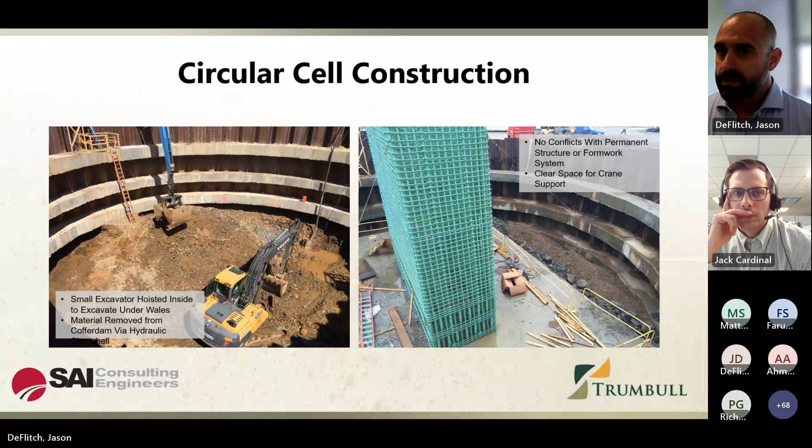Okay. All right, second question from Greg. What caused the discrepancy in stiffnesses in Unit 1 where 50% of the load went to Pier 1 and the remaining 50% distribution to the other 3 piers, 2, 3, and 4? Well, as I mentioned, that was because of the stiffness of it. That pier was a shorter pier, and then stiffness of it, because a lot of moment and also displacement at that end.

And what we found out in our model is that the forces, the wind, applied to the substructure of, let's say, Pier 3 or 2, went up through the bearing into the superstructure and went back to Pier 1. This is something we normally don't consider, how wind to the substructure goes through the bearing back to the other substructure, which the model showed happened.

Okay. And then lastly, how did the modified Service 1 load case with 115 miles per hour come about? As I said, that was to be a little bit conservative and realistic. We said that the possibility of wind of this amount with a high temperature day could happen on that structure. And I think the decision was made originally by the district, and it was a good decision because of just the probability of such a thing could happen. Okay.

So we'll hold on for a minute or two here, see if any more questions come in. Yeah, one comment about the wind in the meantime is we did have wind meters on the tips of our booms, and we've experienced winds during construction, we were not working at those times, but in excess of 85 miles per hour. So there may have been even higher than that at times we were not recording. Just to validate, I'm out there with 115 miles per hour. Yeah, that's good to know.